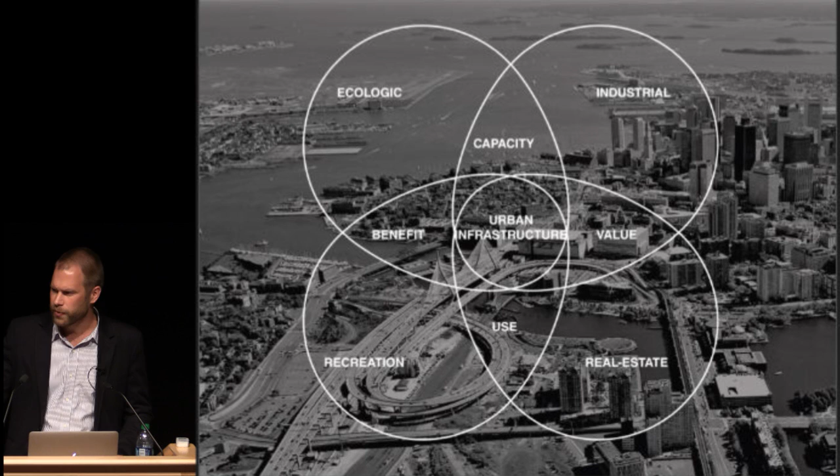This first slide is essentially trying to illustrate a new conception of urban infrastructure as a balance between competing interests in the urban environment. Where urban infrastructure is often built to satisfy a singular or specific purpose, how do we start to understand that large-scale urban and industrial infrastructure can actually be tuned to the various interests in a city?

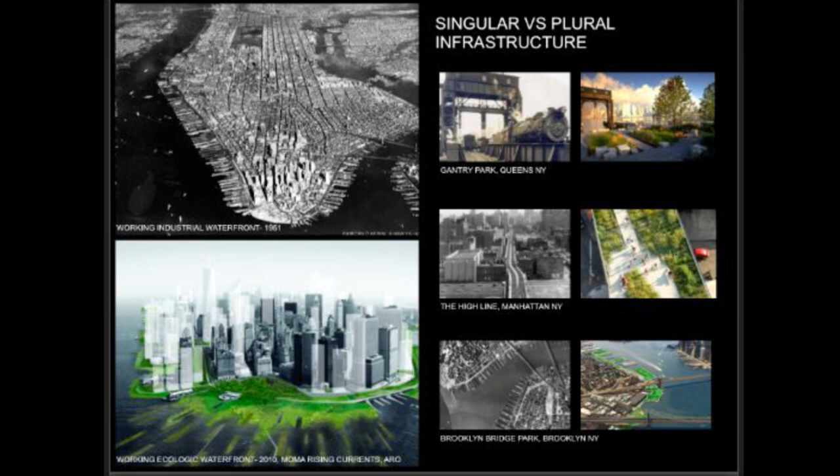To give some background precedent, I think looking at the island of Manhattan as essentially a singular piece of infrastructure is helpful. Here you see an aerial photograph from only about 50 years ago, showing the iron grid of Manhattan extending into the shoreline, into a series of industrial piers, which were the receivers and distributors of goods into what is, in fact, the largest consumer in the United States.

Housing so many people, it consumes so many goods. You can see in the 60s how that system at the waterfront was a major gateway for goods into and out of the city. The barges connected into freight rail. The freight rail brought goods that were produced in the city out, and goods into the city.

Now what you see on the right is that every single one of these pieces of infrastructure has essentially lost that purpose. The current status of Manhattan is that there are no goods delivered or distributed by barge, and no goods delivered or distributed by freight rail. Manhattan, the largest consumer in the United States, has become completely dependent on the singular transit method of trucking, typically from Port Newark, which is the least efficient transit method, significantly amplifying the environmental footprint of that infrastructure.

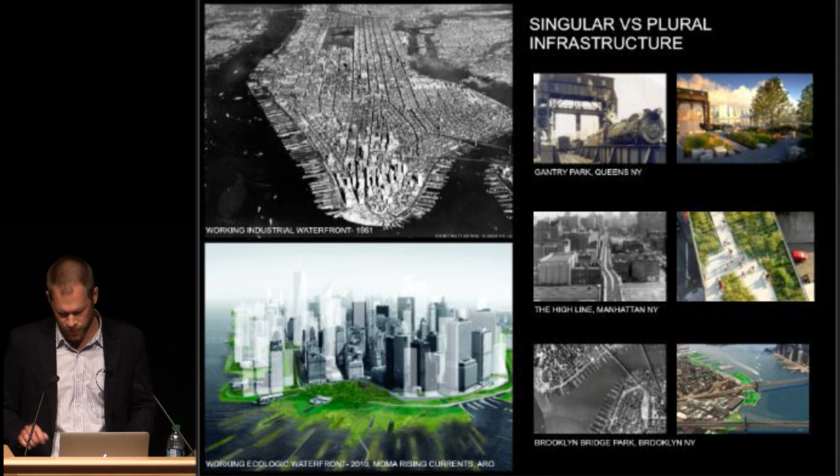While those pieces of infrastructure have largely been repurposed for more contemporary uses, like shoreline defenses or even public parks, they've been stripped of that industrial capacity. So in the question of what is more or less green, the transition to parks, while maybe being more amenable to the local community, in fact strips away that infrastructural capacity. Much of my investigation is to analyze ways to actually balance these, as opposed to them needing to be an either-or. Is there the potential for them to be a both-and?

These slides show two kinds of consequences. The federal and regional governments recognize the dependency we all have for large-scale industrial infrastructure based on our communal needs for goods. Accordingly, they create a great deal of legislation around broad regional sustainability, such as the preservation of rail, and the preservation of ports and harbors. On the other hand, small-scale local communities, in fact, see very little benefit often in those infrastructures.

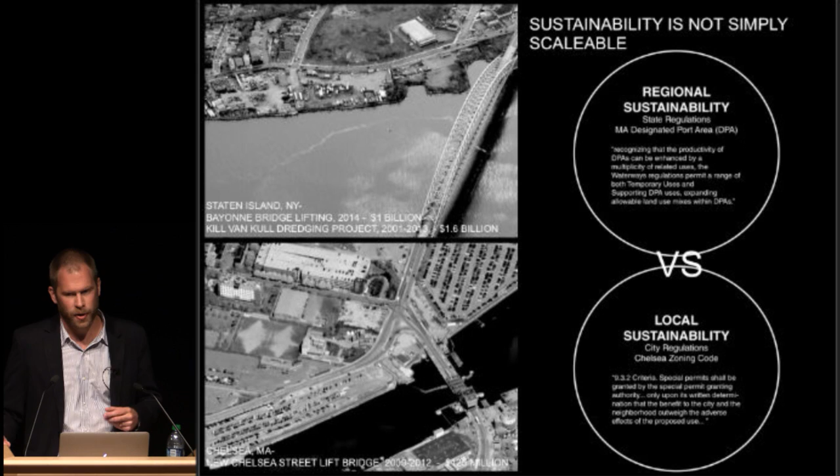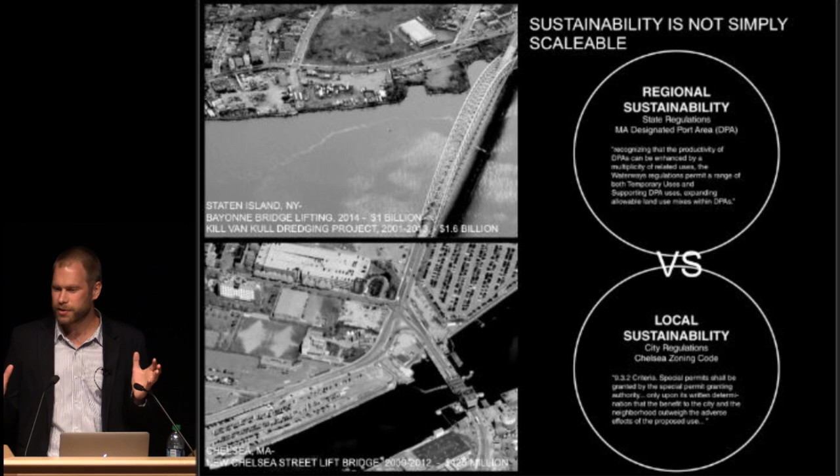They accordingly seek to transform their waterfronts and rail corridors into more community-beneficial programs, such as rails-to-trails or conversion to parks on the waterfront. The conflict between these regional initiatives and local initiatives leads to what I call a great urban stagnation, happening across the east coast and west coast of the United States, where some of the most valuable real estate in Boston and New York is essentially being used for auto scrapping or temporary uses like car parking. The most dominant use of the industrial waterfront of Boston right now is parking, which has no advantage to anyone because they can't work out a balanced use for these landscapes.

Accordingly, our work tries to find ways of better designing these infrastructures so that they can serve both interests.

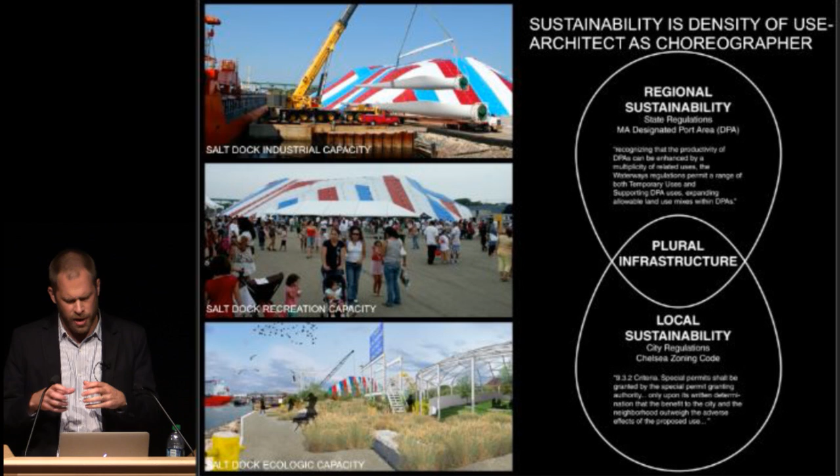Some of what I'll talk about today is my role. I'm an architect, but I think the palette of what we work on far exceeds what is typically understood as an architect's role to make a building. I think it's also really changed the way an architect in fact works, where an architect perhaps typically works on very specific and finite projects and products.

Our way of working is much more in the life of the infrastructure. One thing we've come to understand, and I hope this is clear in our projects, is that designing for sustainability is not a finite process, and your role as a designer is not finite. You don't just implement something and leave it behind. Infrastructure in particular, and industries and cities, exist over a duration of time.

They exist over a lifetime, and the context changes, the industry changes, the infrastructure changes. So what was efficient or sustainable one day is very different in a matter of very quick time. So how do you design for the life of an industry, and what is the role of a designer to essentially function across that life?

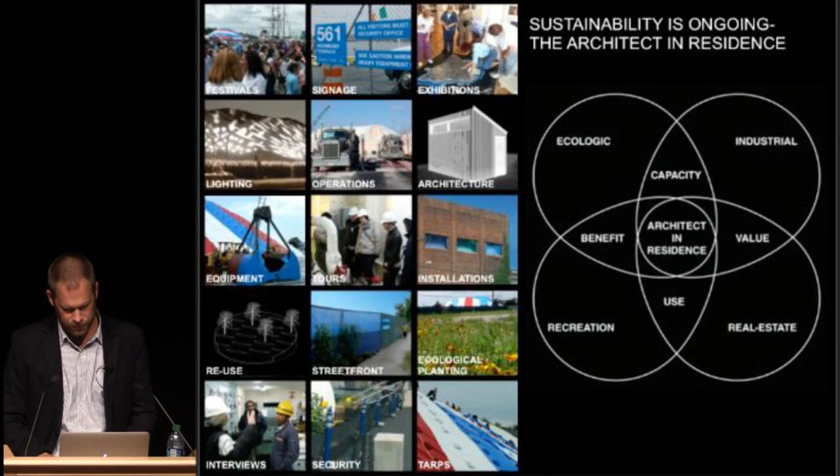This was, in fact, during the Big Dig, the tail end of the development, where there was a huge amount of investment putting the central artery underground. Just before it goes underground, they actually created a huge elevated infrastructure that leads from Quincy into Boston.

So the charge we've been asked, we're working with the Mass DOT, the agency that manages this infrastructure, to redesign the space under the highway. What we're first looking at is this observation that while this is a major connector in the city for thousands of people to get into and out of the city, and in fact through the city, it on the same hand subdivides communities quite sharply.

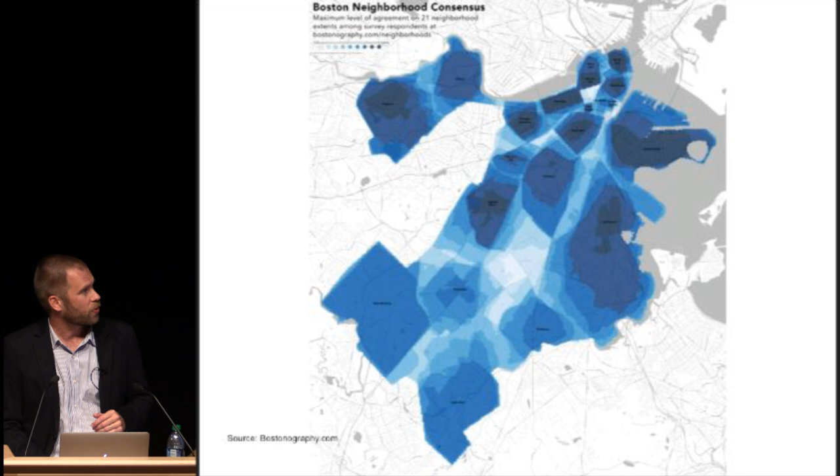So these are the Bostonography maps, you guys may have seen these, fairly well documented at this point, where essentially they're tracing people's cognitive perception of the cities in which they live. You can see here, I think what's interesting is that through a series of interviews, they've identified how people understand communities like South Boston versus the South End.

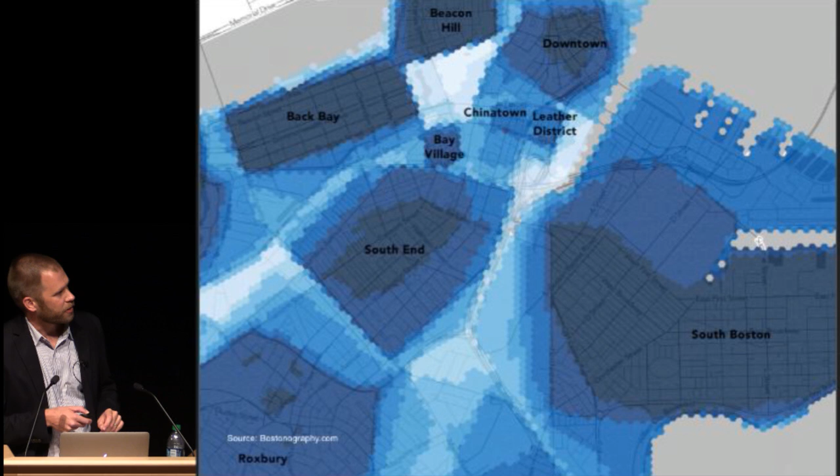But in many ways, what's more interesting in these maps is to observe what, in fact, hasn't been understood, right, which is these spaces between the communities. And more often than not, what you start to discover is those are the major infrastructures in the city. These maps show that no one seems to, even though these are probably some of the biggest landmarks, things everyone uses, visitors to the city, people who live in the city, no one has a stake in them. No one feels they own them. They're not really part of the city. They're sort of at the edges of everything.

So the first philosophy of how we approach a project like this is to actually look at the project and determine, well, if we strip away that perception, how is it centered in the city? And when you look at even just the overall geomorphology of Boston, you quickly discover that it's quite in the heart of the entire Boston district. And in fact, it serves as a gateway between many of the most admired and loved resources in the city, which are the green corridors.

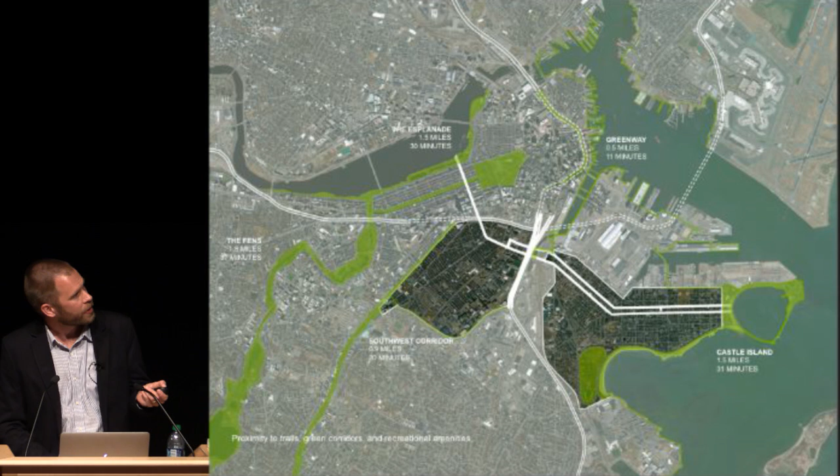You can see here the relation of the Fort Point Channel to the highway and how those different infrastructures can actually integrate. Are there ways to actually create new types of landscapes under the highway that extend the public space of the city?

Similarly, this is a project by a small design firm called D-Land Studio, where they're looking at the potential of how the landscape can actually treat the water coming off of the highway before it goes into our shared water systems. How can you actually sort of decontaminate the water?

These types of projects, this is now starting to be a project in Toronto for how to transition that into a public space, is what's led to the foundation of our design with the Mass DOT, which is essentially a new layered strategy for how to build a public landscape in the understory of the highway. I'll go through some examples of this in some of our other work - types of interventions that we're now proposing in a layered strategy.

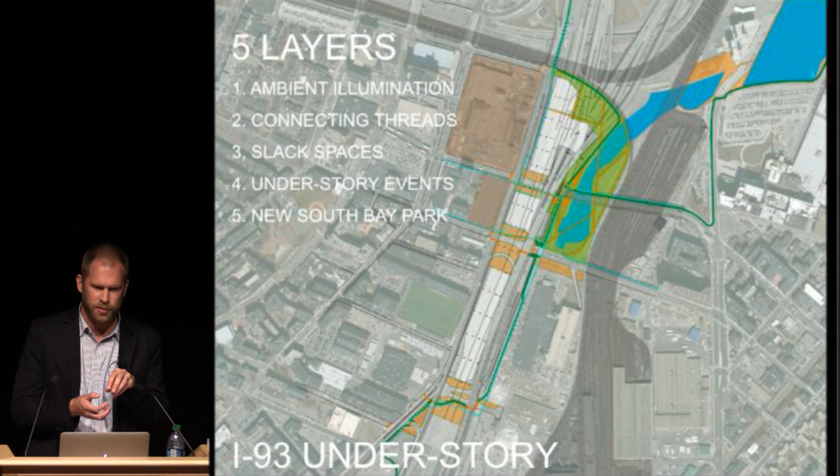The concept is that to remedy or interact with a landscape as dynamic as this, it's not a matter of building a building or building a piece of infrastructure. Almost all of our designs work in a layered strategy across multiple mediums, which causes us as designers to essentially shape shift or morph or change the medium in which we work. Obviously working with a lot of sub-consultants, different specialists, but ourselves having to become specialists in diverse things.

The next project - that project is very much in its infant state. This project is far more developed. This is a project I started in 2005 when I was a student myself. This was analyzing the convergence of major global shipping networks into Boston Harbor.

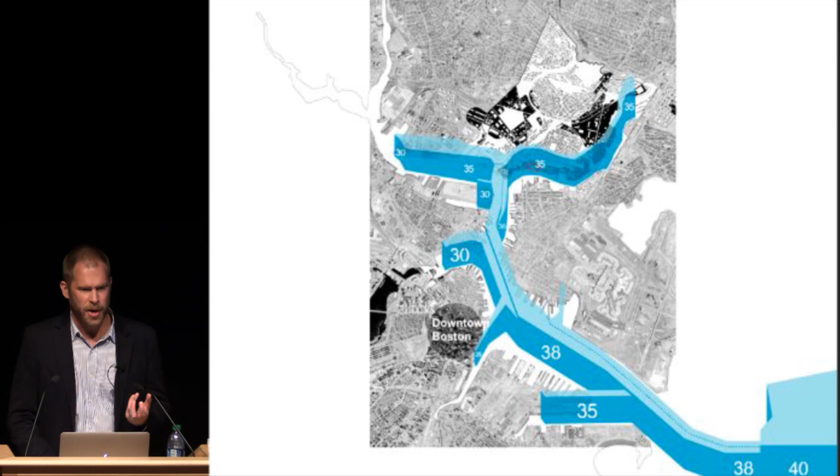So this is road salt being delivered from Mexico to the shores of Chelsea, Massachusetts. You can see that kind of contradiction of scales - how very quickly you understand that people can perceive this as a blight or an intrusion into their city, even though it's a resource we all depend on, and even though this is a highly efficient regional system of delivery that's saving tons of trucks on the road, it in fact has very immediate impacts on the people who live in the city. This is that distribution network, just to give a sense of that sort of scale of global infrastructure.

So some of what we looked at as designers at first was just the specific characteristics of this landscape. One of the problems that often comes up with how people address these industrial infrastructures is sort of an 'all industries are the same' mentality - like oil terminals, salt terminals, rail yards. They're industry, and we classify them as such and put them on the edge to not be thought about. I think one of the really fascinating things is that these industries are actually very specific and very unique.

So in the case of the salt industry, it's one of the few remaining large-scale material distributions that's actually very visible and very exposed. It's not shipped in containers, it's not put in tanks - it's actually something that the community can watch and understand. So in this case, they can understand where all the materials come from.

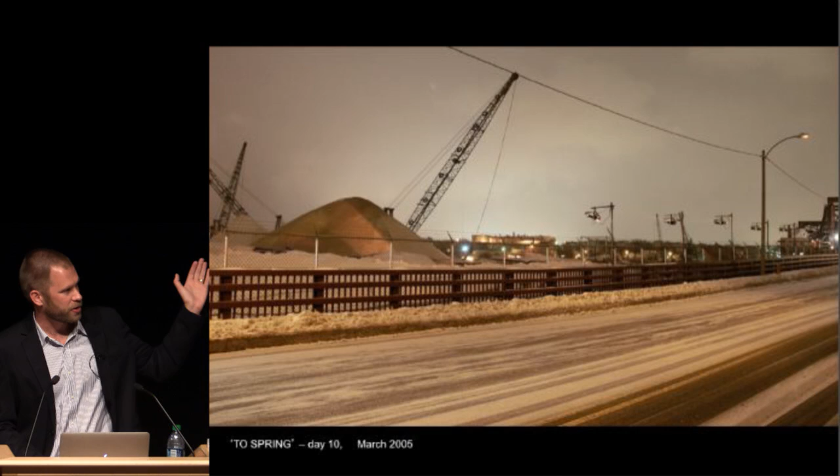I think what was compelling to us and what really in a way launched a lot of this work was to see how in such a simple, efficient gesture, it actually changed the entire conversation about the industry from being something that was like this foreign blight to all of a sudden they're writing about the local salt piles in the art section of the Boston Globe and the Boston Herald. And the company that we were working with, I think, was also equally compelled to start understanding that there was different ways that this facility could be perceived or appreciated.

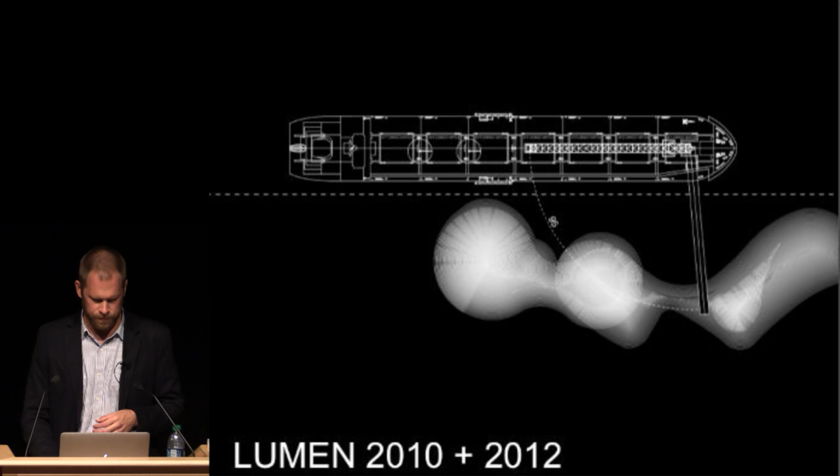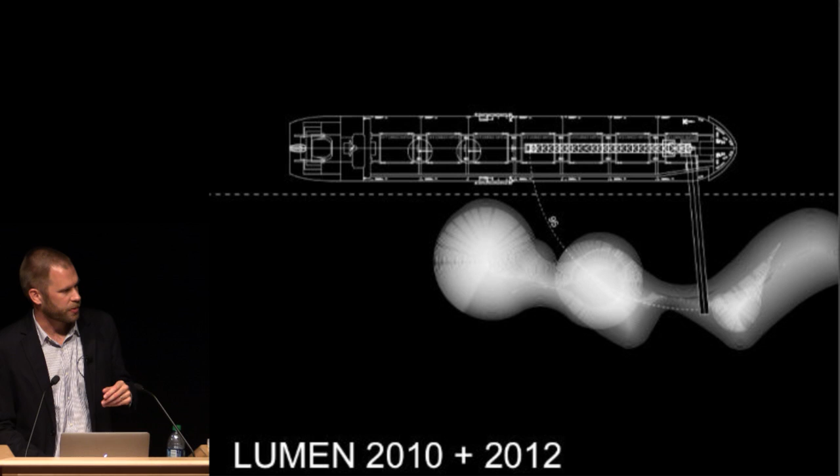So that led into what I think was a slight advancement on that concept, which is essentially a film festival that we've started designing. We've done it twice. We're going to do it again this upcoming summer, called LUMEN. And this is based on, again, analyzing the capacity of the industry and the specific operations of the industry.

In this case, seeing the fact that salt is very seasonal, as I mentioned before. In winter months, we use a lot of road salt. Massachusetts uses about 1.5 million tons of salt annually to de-ice its roadways. So those pictures I've shown, these facilities typically hold about 200,000 tons. But 1.5 million tons is quite a bit. It'd be hard to probably fathom that.

If you can imagine this summer, what removing that salt creates as an opportunity is you're left with a massive area of land in the city, right on the waterfront, which typically isn't available in most urban environments. Part of our work with the company, living as a living designer, working with them year after year, not as a finite project but designing the life of the industry, is to actually transform that landscape for new uses, to repurpose it.

So we've essentially started a series of festivals. We have an event at our dock just tonight. I think the most successful of those, and maybe the one I'm most excited by, is called LUMEN. It's a film festival with the Council of Arts and Humanities in Staten Island, where we engage about 40 artists from the international community, New York and the world, to install pieces on the dock.

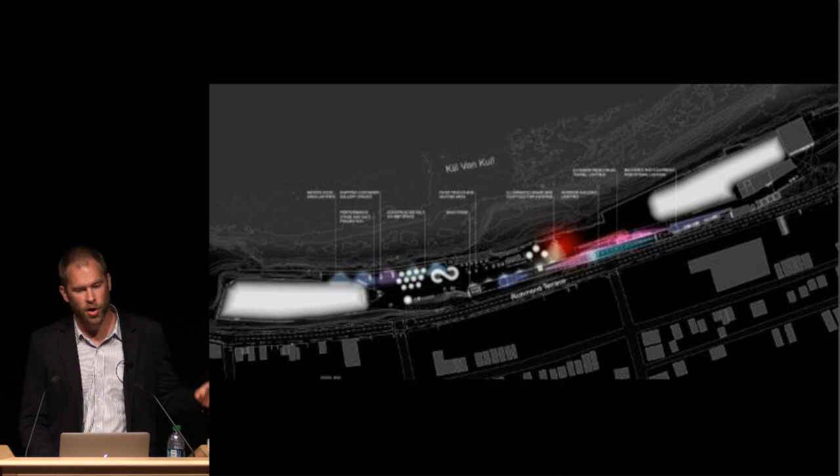Our work is to essentially transform that dock on a temporary basis into a stage set for these events. Usually they're one-night events. We have about 7,000 people typically come, with the 40 artists installing for just the one night. And we transform what is in fact a former U.S. gypsum facility that we're demolishing to make way for a salt dock into this venue for the arts.

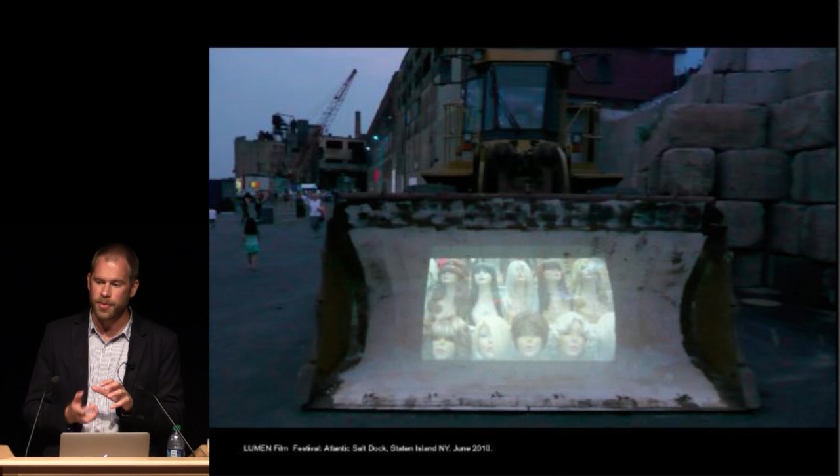We install a series of lights which work to amplify that industrial landscape, both for pragmatic safety reasons, to make these industrial environments usable, but also to set the stage for the intervention of the artist. And then we work with the artist to manipulate the various components of the industry to become the frameworks for their installations.

What's exciting is recognizing that these facilities have their own unique and specific capacities. Our ability to partner with other industries and get materials very rapidly and easily is inherent to how these businesses work. So we're able to translate and tune those systems to make highly responsive, robust art venues that can support types of installations that no museum could possibly support.

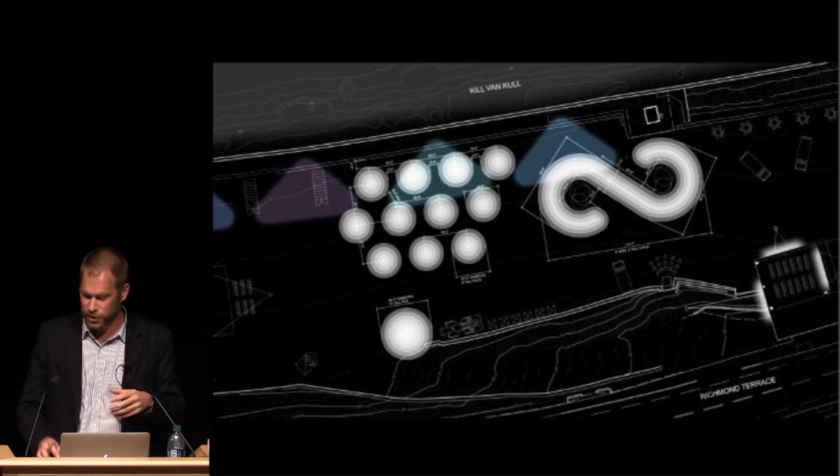I thought one of the most interesting aspects is the salt medium itself. Obviously you're dealing with people who are very good at shaping landscapes with salt. So we work with the crews of the dock to assemble a series of landscapes, specifically tuned to each artist's work, to create gallery spaces, podiums for installations, projection surfaces, and installations specific to the artist's work.

The outcome has been very compelling to us because now, in addition to this facility being understood as a major global resource, it's actually been identified, this is in Staten Island, New York, as an art venue for the city. It's now listed in the register of art venues in Staten Island as a resource for the city. And in about a week we're getting a project, the Ship of Tolerance by Ilya and Emilia Kabakov, two very significant Russian artists, as this has now become a public art venue on top of its function as a salt dock, simply by opening it to that use.

The last project I want to show is probably the most fleshed out of these ongoing interventions. This is a project we've been working on for about 6 years, back in Chelsea, Massachusetts, where we had done those initial light projections. This is actually a project to expand the salt terminal.

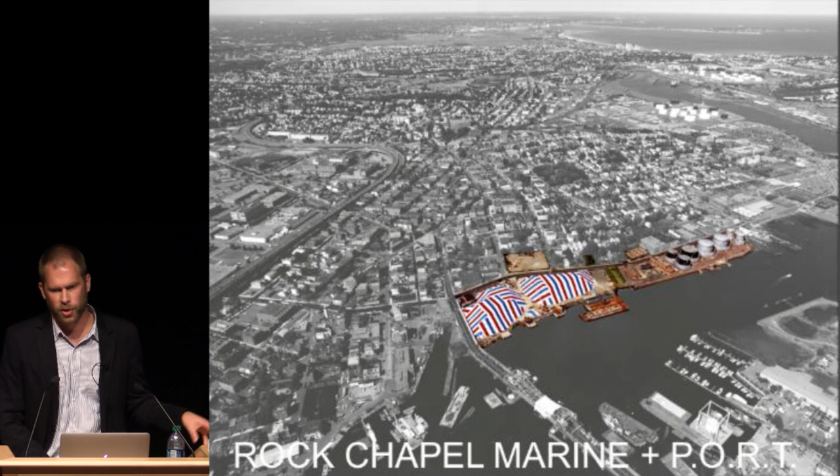Following my initial work with the company was those projections, and following some of the success of that work, we were engaged to reconceive the potentials of this oil terminal. Coastal Oil, a division of Texaco, had pulled out of Boston Harbor and left behind this about 6-acre oil terminal immediately adjacent to the salt facility. The salt facility is actually in need of expansion due to the new technologies of ships.

So what we started hashing out, first with the company, eventually incorporating many dialogues with the city, this was about a 6-year negotiation between state, city, and industrial representatives, is essentially a repartitioning and reuse of that former oil terminal into a shared facility of salt distribution and salt operations and a new public park, called the Port, which stands for the Publicly Organized Recreation Territory. One of the most interesting things about the negotiation was recognizing the specificity of the industry, where it expands in the winter and contracts in the summer.

I think quite fortuitously, parks work in quite the opposite way. In the winter in New England, parks are fairly underused, whereas in the summer they're very used. So it's kind of a marriage made in heaven, parks and salt docks.

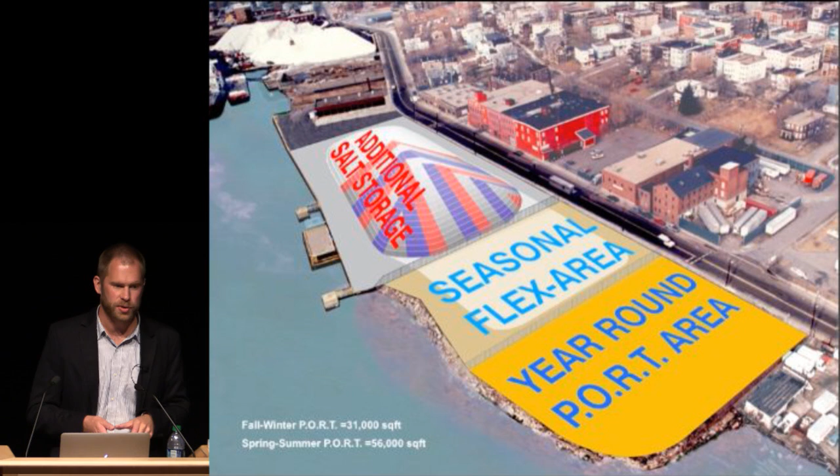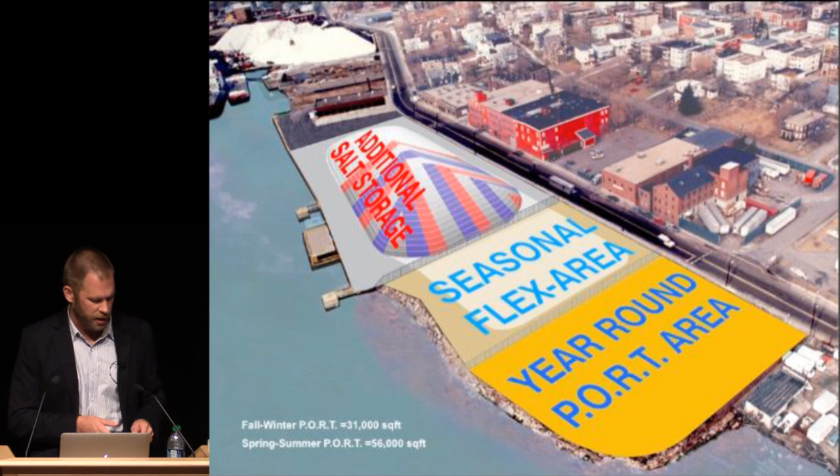Just as a precedent, and this was actually quite funny, the High Line for us is a sort of amazing design. Everyone appreciates how it's completely transformed this district of the city, yet putting that in the equation of the loss of all the regional infrastructure in Manhattan, it takes on a different meaning. So while we appreciate the design, it has different ramifications on the urban environment.

Ironically, this was the project we took our clients to in order to sell them on the idea of merging, to show them that the city could appreciate industrial infrastructure in this way. It really wasn't until we showed the clients this specific project that they could appreciate the potential of merging industry and public access landscapes.

So this was a comic that came out, a very cynical comic right at the beginning of our proposal, and I think this quote sums up where the city was at in their mind: 'I have a feeling I will find out soon what Chelsea will stand for the next 100 years. Will it be residential or industrial? I hope you choose wisely. I already have one bag packed.'

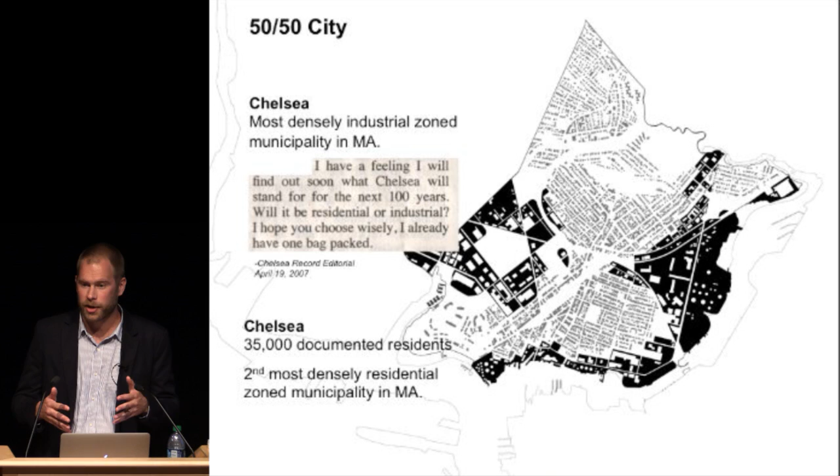And it was to say that a city can only be one or the other—there's no way you could have both a residential community and an industry cohabitating. But keep in mind, the industry has been here for 50 years. Everyone who works there lives in the city. So in many ways it's very interwoven, yet still perceived as something separate. How do we as designers reposition that?

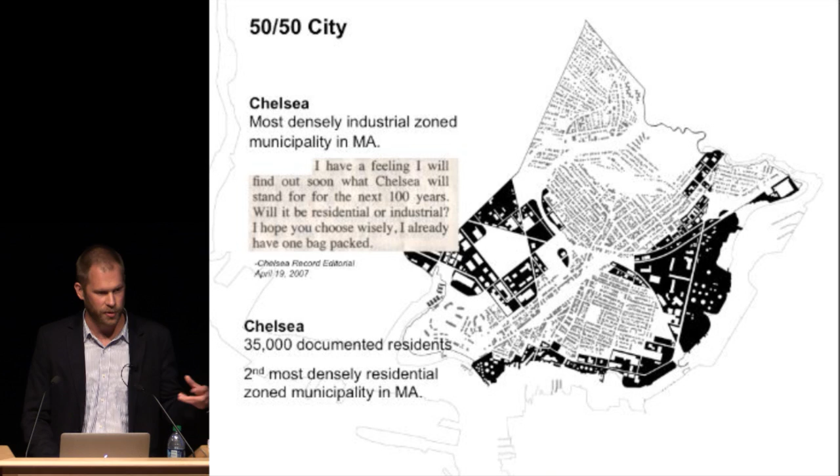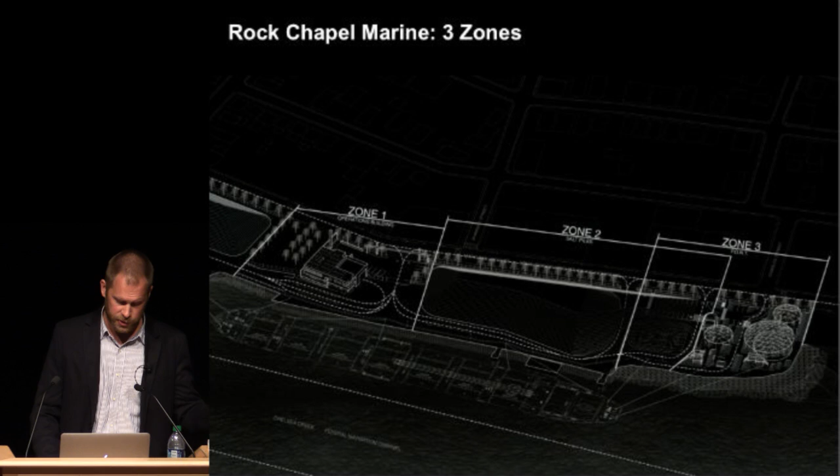Second phase is the construction of the park, which is actually opening for its first public event tonight. And then the construction of Zone 1, the next stage, the development of a new headquarters distribution hub for the company. So to run you through that process quickly, and then I'll be done.

This is the initial phase, essentially the removal of the petroleum from the site, the remediation of the site. This was an asphalt batching plant—probably should have said that before.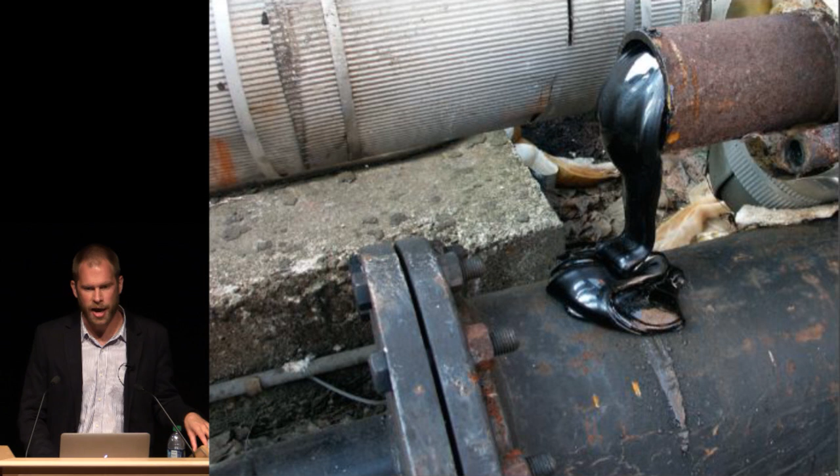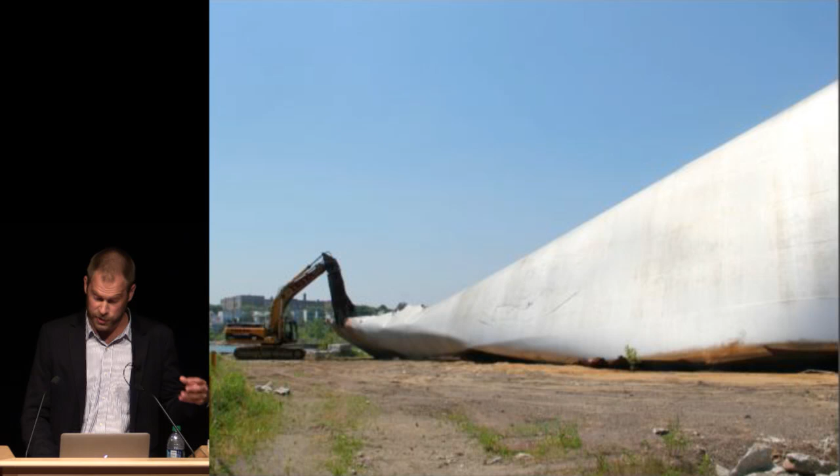Asphalt batching in urban environments is a very difficult industry, probably not one I would advocate, in the sense that you have to boil a very low-grade, heavy oil to get it fluid enough to pave our roads. Accordingly, you're putting a huge amount of oil vapor into the atmosphere in an urban environment, which is fairly damaging. So one of our initial goals of this project was simply to eliminate an asphalt batching plant from the city and replace it with a more urban industry.

These are some demolition photos of the deconstruction of the oil terminal. Recognizing that this is a living process in the city, we engaged the process of demolition through design with a series of light installations that marked the removal of the oil terminal.

When you talk to many people in the city of Chelsea, they'll say, 'Oh, I had no idea even growing up here that we were on the waterfront.' We have no connection. So part of the impetus for these installations is to find ways of re-engaging the waterfront with the city.

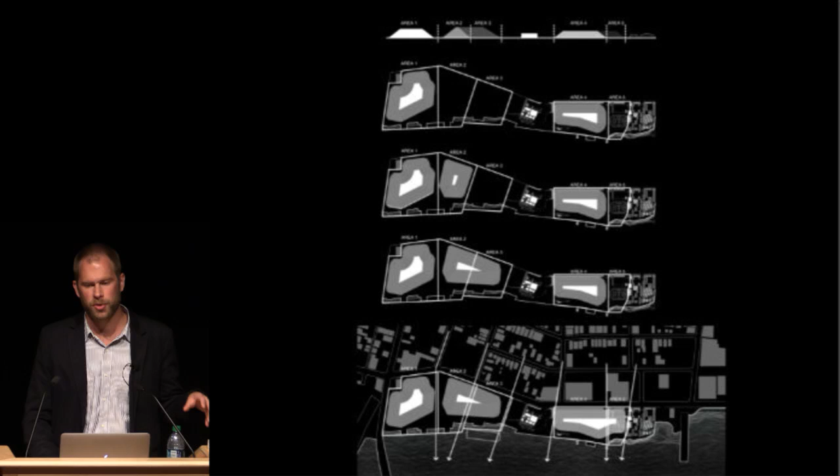So phase one was the construction of the salt facility. And as you see here, even the organization of the salt piles was built around a series of community views, shaping the views of the community to the waterfront.

How do you choreograph and sculpt the salt itself? In this process of construction, we tried to tap the networks that exist within the industry.

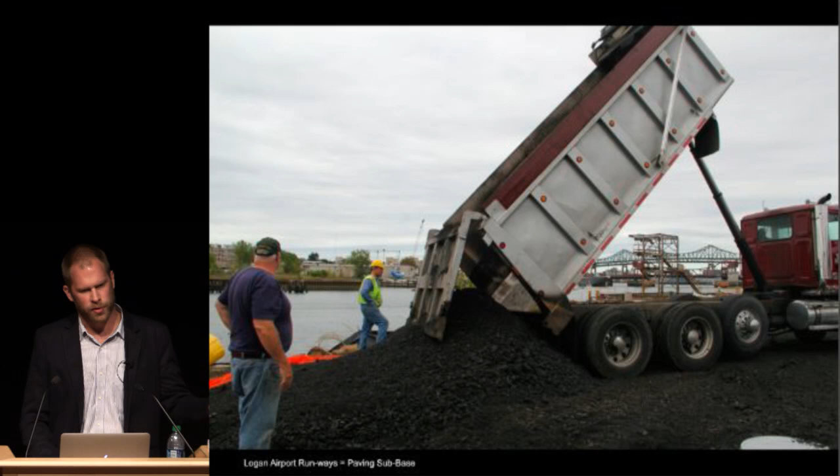So here you're actually seeing Logan Airport. They had to remill all of their runways at the time we were building our dock, so we were able to build the dock out of the former runways of Logan Airport, recycling a material that was destined for landfill to become the base for our dock construction.

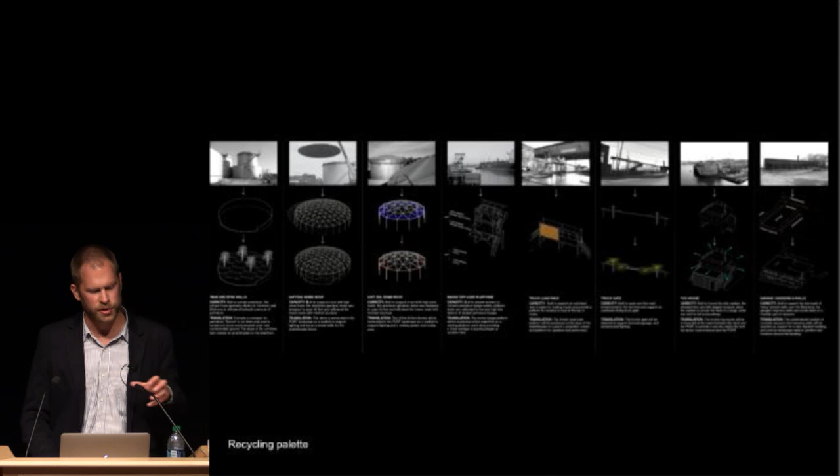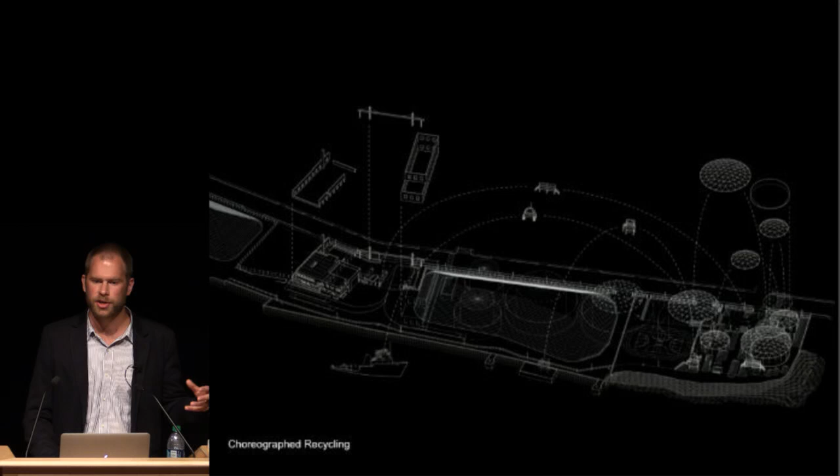This portion, the development of the public park, again repurposes a series of industrial elements of the park. We essentially categorized all the different elements of the oil terminal, analyzed their various purposes and use, and designed the translation of those uses to become new elements in the public park.

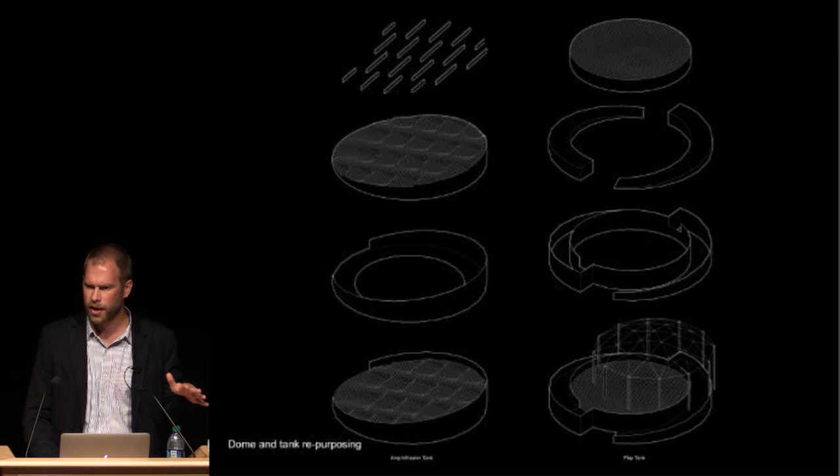So this is the recycling diagram, showing how one thing becomes something else: how a truck loading rack becomes a viewing platform, how a system of domes get removed and become trellises over the park, how we cut the tanks themselves down to become containers for various programs. I'll show in a minute, like an amphitheater.

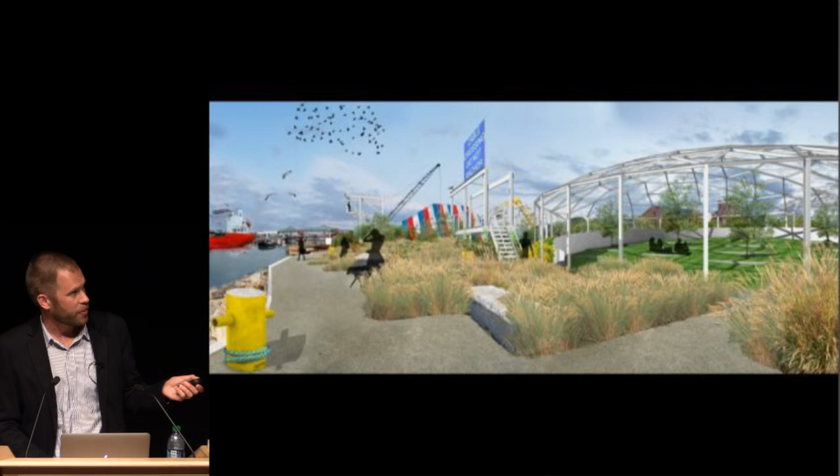This becomes essentially the design philosophy, about extending the space of the industrial landscape and repurposing those elements to become new elements in a public park, where the various platforms become viewing elements, the tank that's been cut down becomes an amphitheater, and we get trellises for lighting and scaffolds.

Part of the landscape design is, of course, that because this is a historically contaminated site, we had to create a new landscape cap.

I think one of the things that was particularly interesting here is to understand that by repurposing those elements from the industrial landscape, you actually start continuing that horizon—continuing elements that are often perceived as discrete to industry and extending them into the public realm, blurring that boundary through the design of the architecture itself.

For the first time, Chelsea is breaking through the heavy industry piled up along the Chelsea Creek and reconnecting with its waterfront. This is the same sort of reclamation project that's underway with more fanfare across the harbor in Boston.

There's one major difference between the two. Boston has seen a boom in real estate after industry left behind, while Chelsea is bringing its citizens to the waterfront by growing industry, which for us really embodies that goal: how do we not see these kinds of infrastructures of our environment as something separate from us, but redesign them so they become part of the urban fabric?